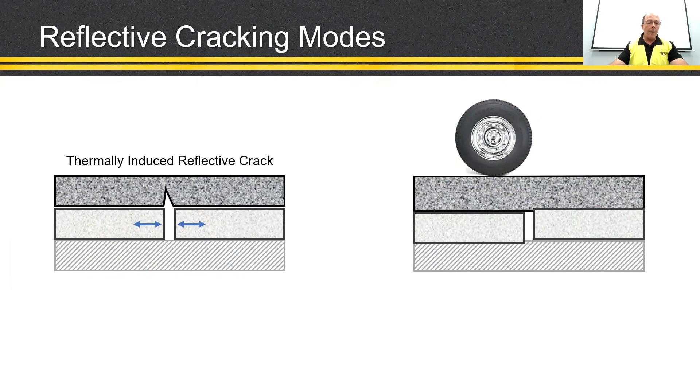So first, there's two general mechanisms for how a reflective crack can occur. One is when the underlying pavement system that has a crack, through thermal expansion, induces a reflective crack back up onto a new layer. The other is load associated, where as the load travels across, whether it's concrete pavement or a crack that goes all the way through flexible pavement, you'll have the slabs rocking up and down and create a reflective crack that way. Then there's a third, which is a hybrid of those two, where both can be happening.

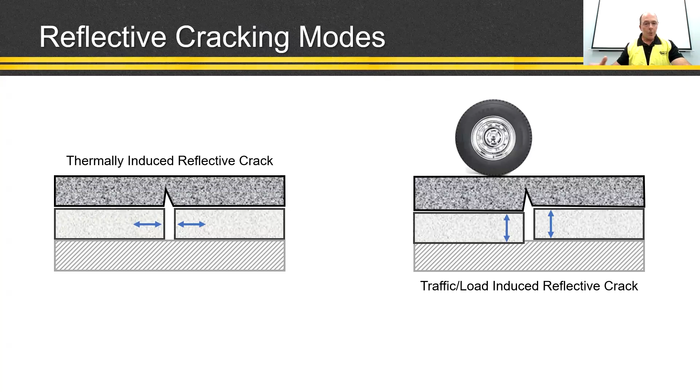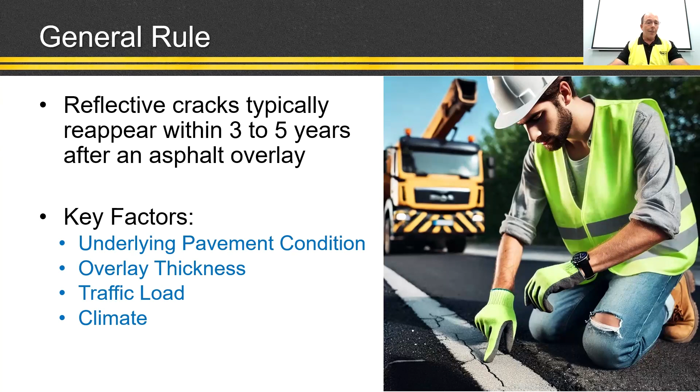Typically, if you don't use a mitigation procedure, a reflective crack will reappear in about 3 to 5 years. There's a general rule of thumb that it's anywhere between 1.5 to 2 years per inch of asphalt. So if you do a 2-inch overlay, in about 3 to 4 years, you'll actually see the reflective crack occur. But the factors that influence that are the underlying pavement condition, the overlay thickness, the loading that you have, your traffic, and the climate.

Now, both uncommon and common mitigation approaches - and I encourage you to type in the chat if you've seen these, because there's a few here I haven't seen. The first one is reinforcement. Here's one I haven't seen: using galvanized steel nesting or netting underneath it. You'll notice there's a cost associated - just to give you a relative feel for how much these different treatments cost per square yard. The pricing is based on an International Journal of Pavement Research and Technology paper from 2016, so you've got to factor in a little inflation, but this will give you a relative feel as we go between the various approaches for how much they cost.

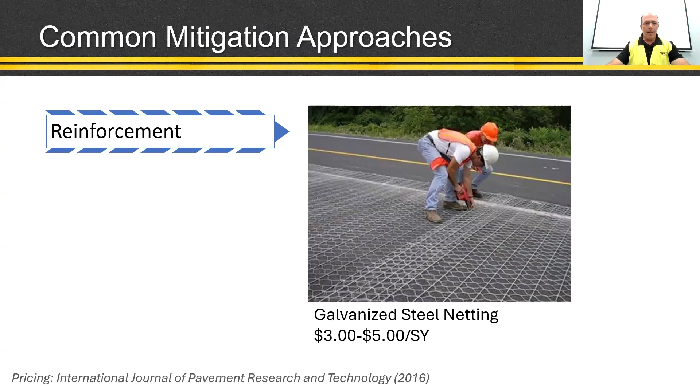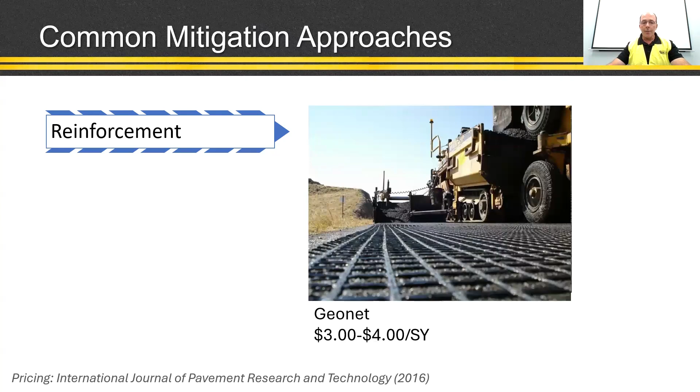So for the galvanized steel, it's $3 to $5 a square yard. Something that's a little more common that I have seen laid down is fiberglass geogrid. Another version of that is something called GeoNet. And then a glass grid, which is one of the topics I'll be discussing today that happened out at the NCAT test track.

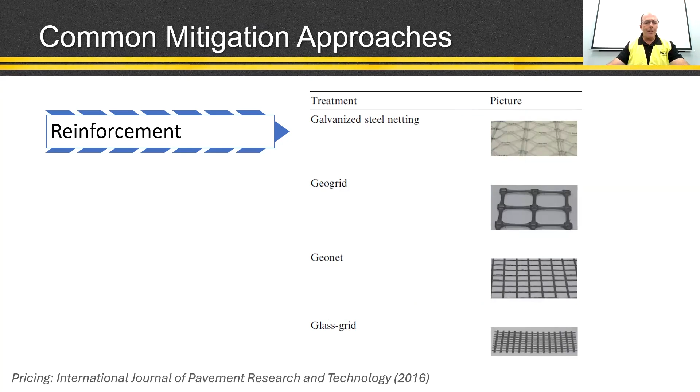So this gives you the range of reinforcement techniques that are commonly, or uncommonly in the steel case, used to try and mitigate reflective cracking. If you know of others, please type them in the chat, I'd appreciate that. In addition to reinforcement is stress relief, to make it so that as stresses build up in the underlying layer, whether through thermal or load, there's some kind of layer there.

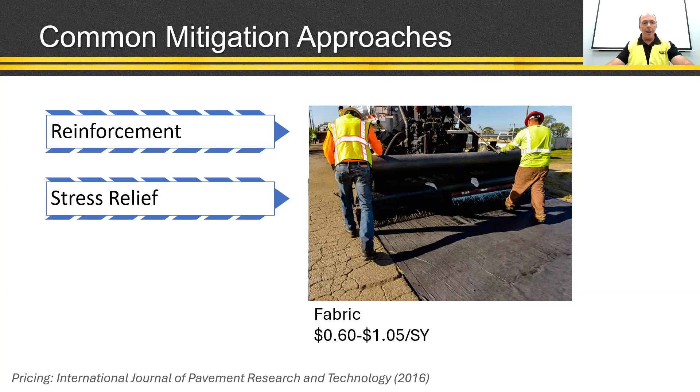The first we'll look at is fabric, and fabric was actually part of the experiment I'm going to discuss as well. You can see the pricing there as well.

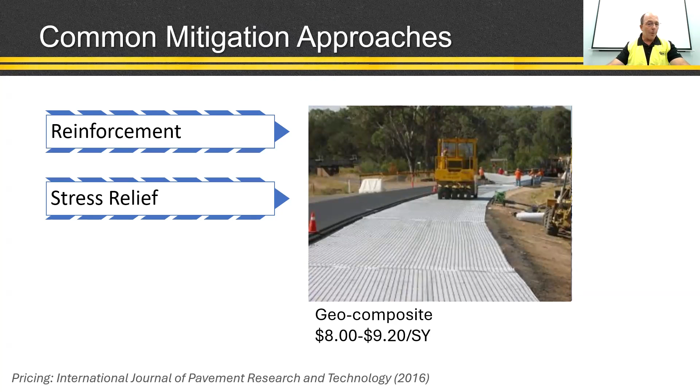And then a geocomposite. Geocomposite is best if you think about the pad underneath carpeting. The geocomposite has not only a grid in it, but also a little bit of sponginess to help relieve that stress. You'll notice the price went up on that one considerably compared to some of the other ones we've been looking at.

And then a stress-absorbing membrane interlayer, affectionately known as a SAMI. In a few moments, we'll be hearing from West Virginia and their experience with the SAMI interlayers.

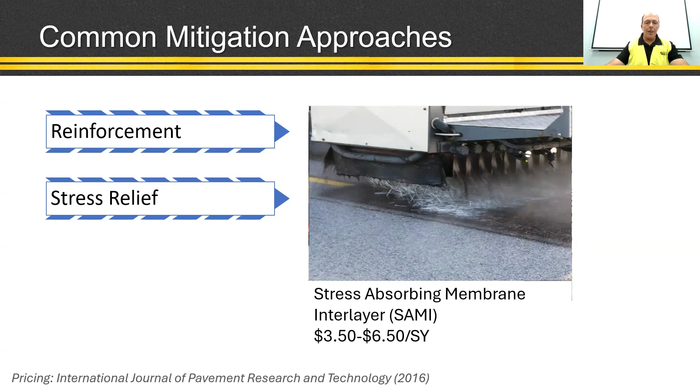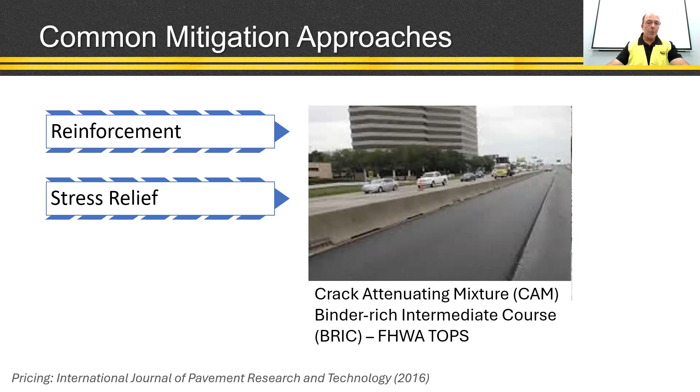If you look at FHWA under their Everyday Counts program, they also promoted TOPS, targeted overlays for pavements. There's a crack attenuating mixture, commonly referred to as a CAM, and then a binder-rich intermediate course, or BRIC. Both of those have been tried to mitigate reflective cracking.

One of the other approaches is just to control it. If you have a jointed concrete pavement and you know exactly where the cracks are and they're straight, you can mark, and after you do your asphalt overlay, saw and seal. So you basically seal the crack before it happens and create it in a uniform way, which is a little bit easier for maintenance.

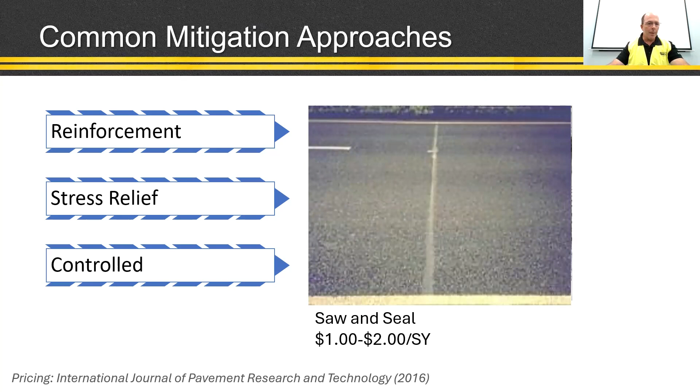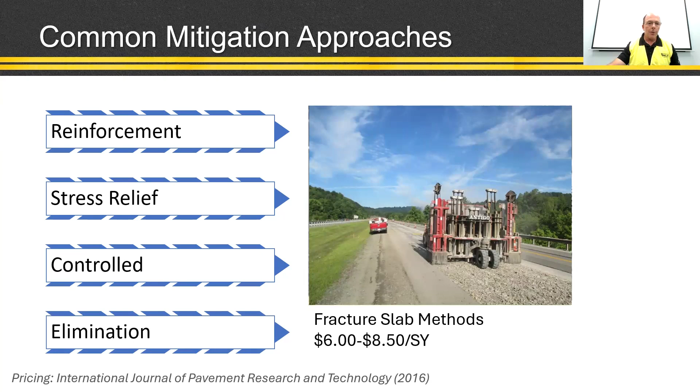And then probably the preferred method is just to get rid of those cracks altogether. If you've got a concrete pavement where the slabs are rocking, you can do a fracture slab method: either break and seat, crack and seat, or the best, which is rubblize, to eliminate the reflective crack altogether, so it's not creating that maintenance challenge with regard to your pavement.

So the NCAT test track has gone through 8 research cycles. Each research cycle, we apply over 10 million ESALs. The 1.7-mile test track is here located in Opelika, Alabama.

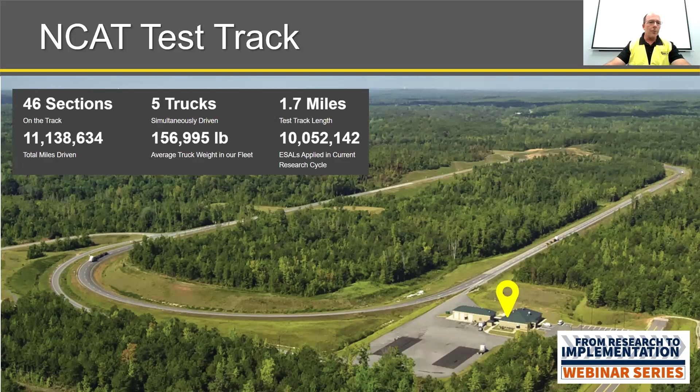11 million miles is equivalent to 23 round trips to the moon and back. And according to Nathan Moore, that's also 17 stops at Buc-ee's by the truckers.

So special thanks to Georgia DOT for sponsoring these sections. And actually, as I'm speaking today, Jacob Walker with GDOT is just a few doors down, and I believe he's in a webinar as well, something internal related.

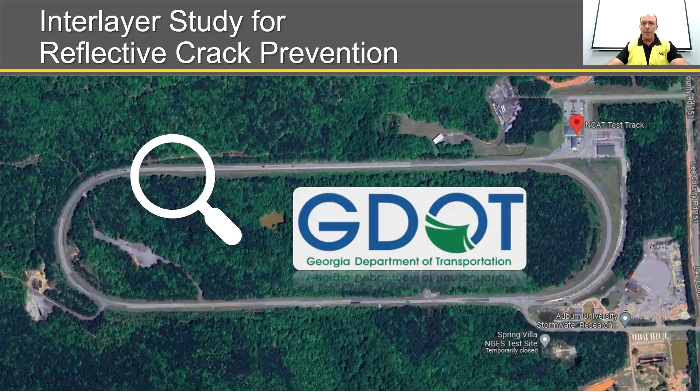So the northern section of the test track, cells N12 and N13, is what I'm going to be discussing, where we've looked on behalf of Georgia DOT at a range of crack relief approaches. In phase 5 of the test track, which occurred in 2012 through 2014, Georgia DOT wanted to look at 2 different approaches to see which one worked better to help retard cracking.

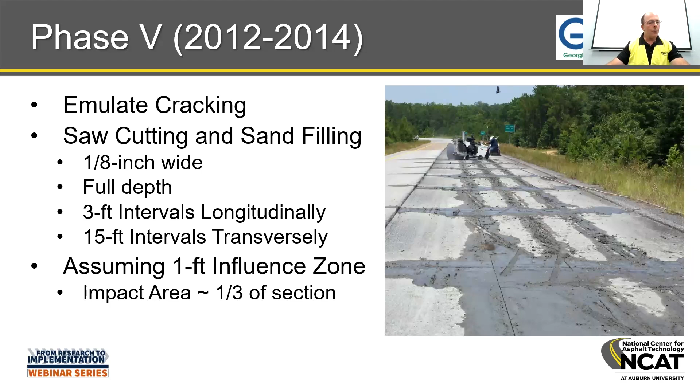And what this does, if you assume about 1 foot of influence around a working crack, is that about a third of this pavement section, the 200-foot section, is going to be impacted under load to try and transfer those reflective cracks up through the pavement structure.

So in cycle 5, carried forward into cycle 6, the two interlayers we looked at were a 0.7 inch double sand seal coat, and a 1.1 inch open graded interlayer, the OGI, which is commonly used in Georgia. Both experienced some cracking. The OGI had about half the reflective cracking come up, but the cracks were very small, low severity, under a quarter inch. Only 6% of the 0.7 double sand seal reflect cracked, but where we didn't have cracking, we had increased rutting. That's the balance we're looking at here.

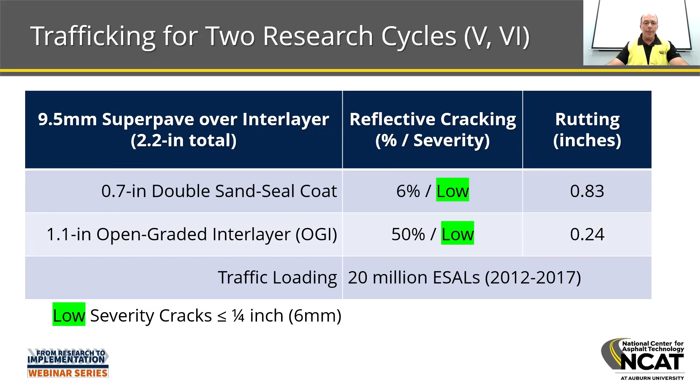So after 20 million loading, or 2 cycles, this is the data we received. At the end of that, Georgia DOT wanted to look at additional methods to mitigate or retard reflective cracking. So starting in 2018, we milled up those 2 sections, cleaned them out, resanded the joints, and applied 6 treatments.

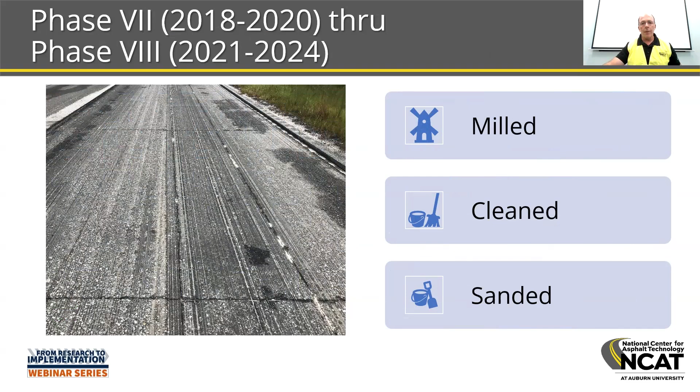Each test section was broken into 3. The first looked at interlayers, from a fabric to a glass grid, selected by the Geosynthetic Materials Association. They actually put all their members in a hat and pulled out 2 member names. GlasGrid and Petromat were selected for the first 2 parts of this. In a second, I'll show you what that looks like.

So here, starting at N12, at the top of the screen you see the Glass Grid, specifically the GlasGrid CG100. They have other products that were placed. The tack coat was a straight asphalt, a PG 64-22, applied at 0.3 gallons per square yard for the Glass Grid and 0.27 gallons per square yard for the Petromat. Of note, Petromat commonly requests a PG 70 when placing their product, but in this case it was decided to keep the tack coat the same, and as you'll see with the data, it didn't make a difference. We saw no cracking in either of these sections.

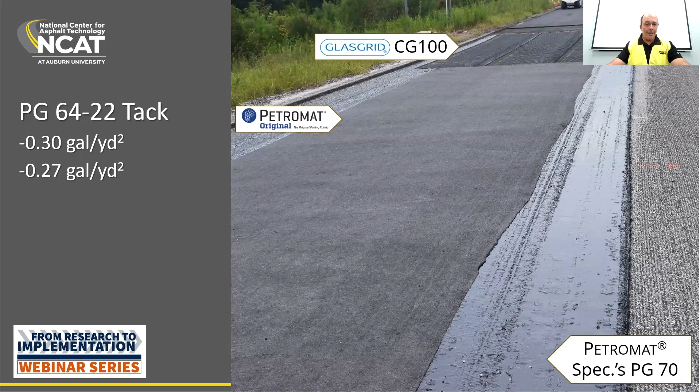Now looking down the lanes, the next section was a virgin chip seal followed by a RAP chip seal. Both had a CRS-2h tack applied at 0.23 gallons per square yard. In hindsight, keeping the tack the same for both was probably not the best course. We probably should have reduced the tack heading into the RAP chip seal, since the coated aggregate had less need for tack. You'll see here in a moment that we got a little bit higher rutting compared to these 2 sections.

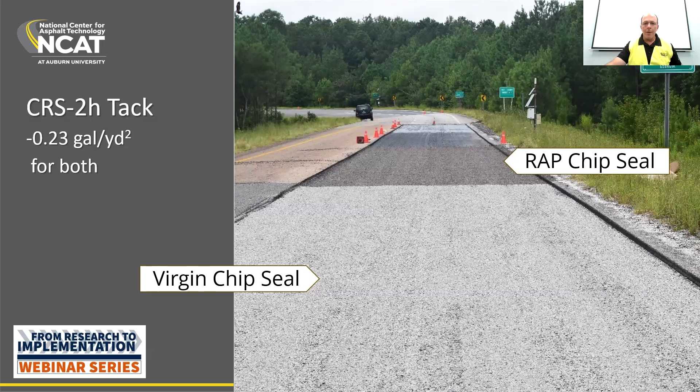Stepping down to the next 2 sections, the next one is an asphalt rubber gap graded, or ARGG, similar to an Arizona gap graded process. Under this was a trackless tack, Blackledge Ultrafuse, used at a tack rate of 0.25 gallons per square yard. Lastly was the OGI, also with the Ultrafuse trackless tack underneath it.

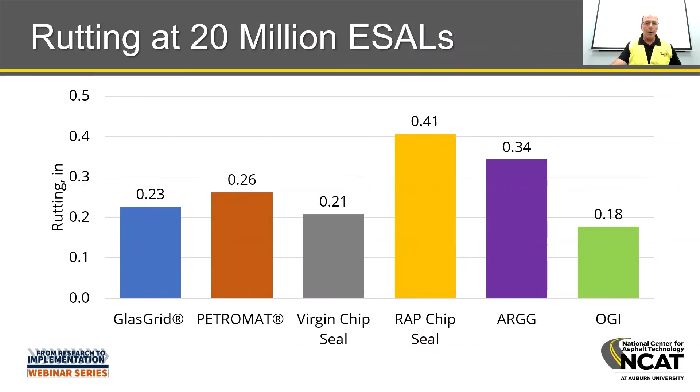Now to performance. This was done over cycles 7 and 8, so 20 million ESALs, 10 million per cycle. At the end, most sections had a quarter inch or less of rutting. The RAP chip seal had the highest, which we think might be attributed to the higher tack placed. The asphalt rubber gap graded came up next with a higher level of rutting compared to the other sections. But this is about cracking.

So where do we fall in cracking? Before looking at the plots, notice the traffic loading doesn't start at 0, it starts 1.5 cycles into the experiment. So at 15 million ESALs is when we saw our first crack, which then propagated out to around 3.1%, for the asphalt rubber gap graded section. In a moment, I'm going to compare the original experiment to this one.

Between the original, under cycle 5, and this one, starting under cycle 7, we changed how we were measuring cracks. In the original experiment we used the Buzz-O-Matic 2000 - that's a joke - where a technician would get down and look very closely, and as soon as we could see a crack, it was cracked. These newer cracks are what we could measure with instrumentation, more in line with what a DOT would use to determine crack initiation.

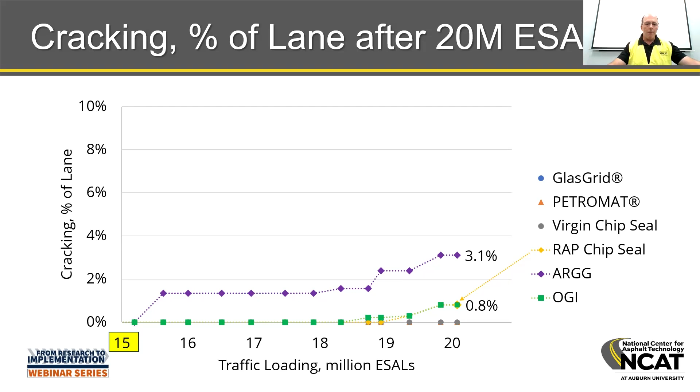Later, almost towards the end of the experiment, 2 other sections, the RAP and the OGI, also experienced very light cracking, less than 1%. Showing that graphically: the glass grid, the Petromat, and the virgin chip seal had no cracking after 20 million ESALs. The RAP and the OGI came in at 0.8%, and the asphalt rubber gap graded a little over 3%.

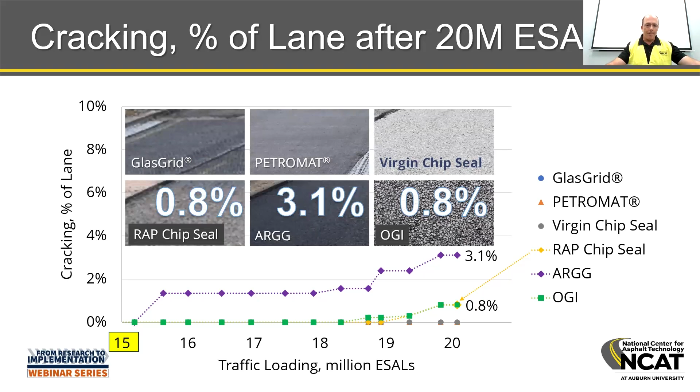During the test track conference, and I encourage you, if you ever get a chance to come to the test track conference, that's where you get to see this. We get to play Dr. Ben Bowers' favorite game, which is Find That Crack.

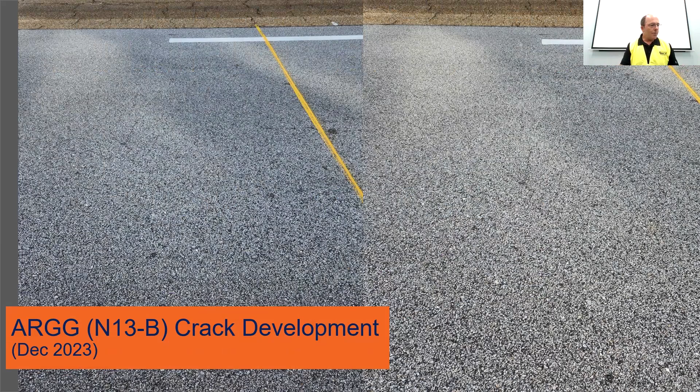As you look at these two sections, this is both the asphalt rubber gap graded on the right and the left, just prior to the end of the cycle, so around 18 million ESALs. You can look and look and you'll see, oh, there is a crack right there. That's where we're starting to get that cracking. Even that is relatively low in thickness, and it's relatively moderate.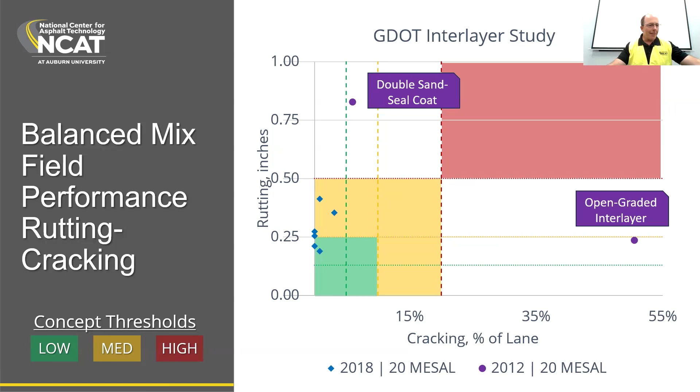And then if I zoom into this round of experiments, the later round, you'll see that all of the sections performed extremely well in mitigating the cracking. All the cracking was low in severity for the three sections that did crack. And we did get a little bit higher rutting in two of the sections.

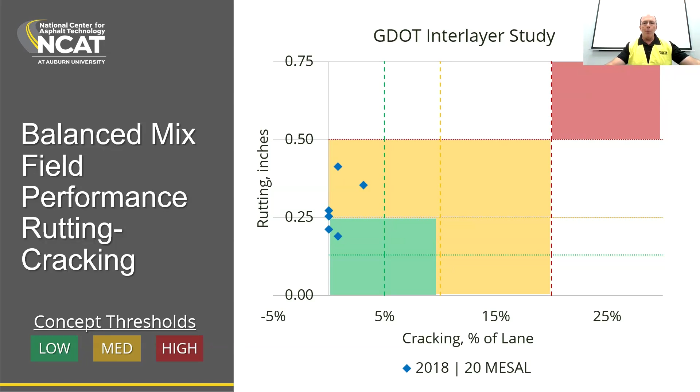To look at this more from a rating system, you might say I came up with my own version of Yelp. This is the Tom Harman version of Yelp, where the red stars are for rutting and the blue stars are for cracking. If you have five stars, you're doing fantastic.

So the top three, the GlasGrid, the Petromat, and the virgin chip, no cracking at all. They all had just a little bit of rutting, so I'm only giving four out of five stars for that. As we step down to the RAP and the OGI, a little bit of cracking, a little bit of rutting, a little bit more rutting in the RAP, and the asphalt rubber gap graded is getting four stars for both.

For the dollar signs that you would typically see in this type of rating system, this is normalized based on no interlayer, just a full depth cost analysis. Georgia DOT was nice enough to give me some of their 2024 cost data, and then I filled in the blank with publicly facing data on the internet, just to give you a relative feel for which ones are more or less cost effective.

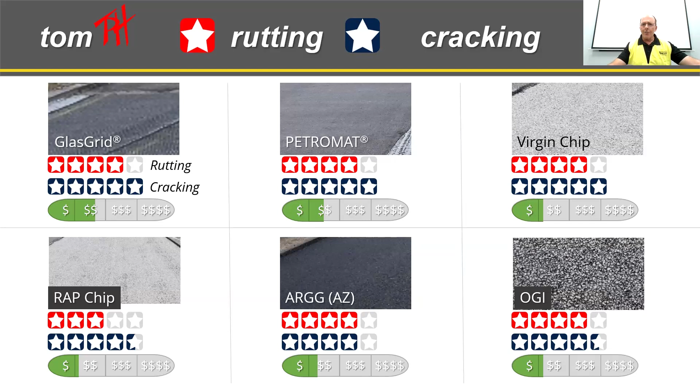So let's take a walk down the track and see what these sections look like towards the end of their loading. This is the GlasGrid, and we're looking down over all the sections. Very light rutting, no cracking at all.

If you were to go out there today, these sections have been milled. A HIMA binder has been used to place an intermediate course, and Georgia has a new section going down looking at things that could be cost competitive with an SMA. They're looking at HIMA binder and modified binders in a balanced mix design.

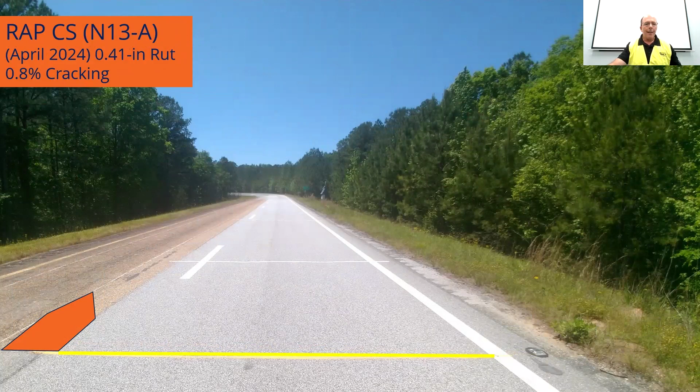So again, here's the GlasGrid, little bit of rutting, no cracking. Very, very similar. Here's the Petromat, a little bit of rutting, no cracking. Stepping down, here's the virgin chip seal, a little bit of rutting, no cracking. Now we get just a touch of cracking, 0.8%, and the RAP, 0.4 inches of rutting.

Going down a little farther, here we have the highest amount of cracking, but only 3%, and a little bit of rutting in the asphalt rubber, and the OGI rounds it off with 0.8% cracking and a little bit of rutting. So here's what we can say about the interlayer research after 20 million ESALs: there is a wide range of interlayer approaches that can be used and have been shown to mitigate reflective cracking or lessen it.

We got slightly higher rutting in the RAP chip seal. This is section N13A, most likely due to the impact of the higher tack coat application. We should have backed that off slightly. And then for the asphalt rubber gap graded, we believe the material we placed was a little too flexible, and that's the reason why that one demonstrated the higher cracking.

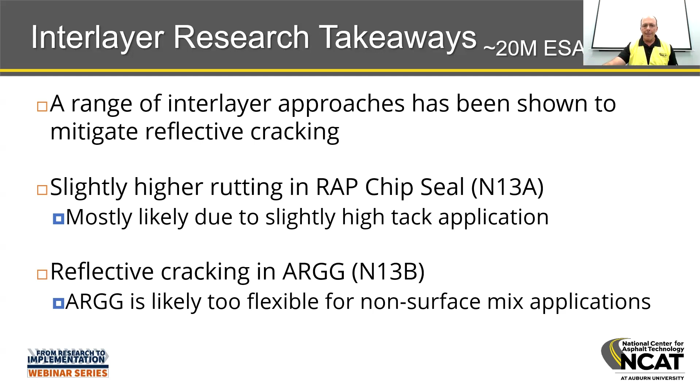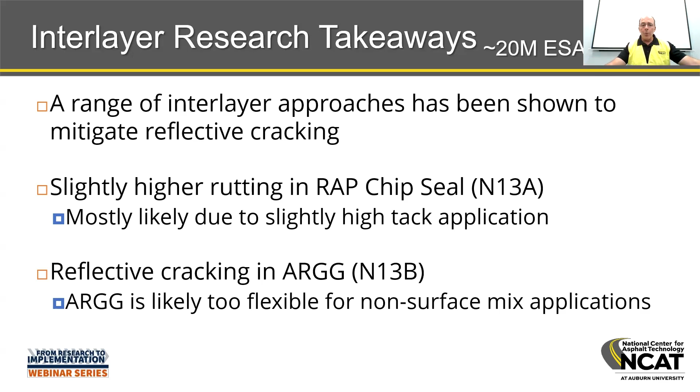Again, my name is Vincent Allison. I'm with the West Virginia DOT, and I want to talk about our relatively brief experience with SAMI, the stress-absorbing membrane interlayer.

So for those that don't know, SAMI, as Tom had mentioned, is essentially a chip seal with fibers, and it's meant to help with reflective cracking. Some agencies will put one of these just right on the surface and leave it there. I think Strausser calls theirs a fiber mat.

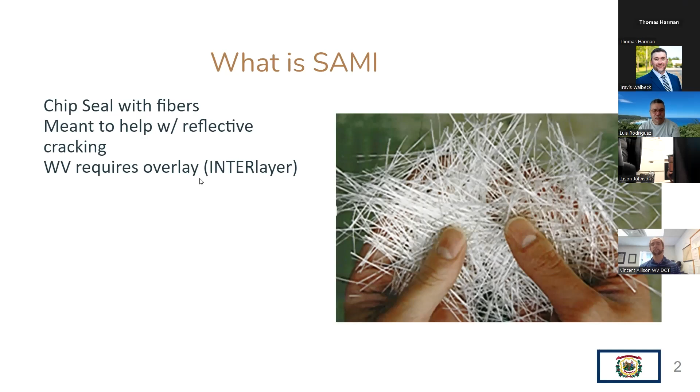But in West Virginia, our specification treats it as an interlayer, so therefore we require an overlay. And I'm using the same picture as Tom here. I can't quite recall where that picture came from originally, but it's a great photo that really shows what's going on there under the hood.

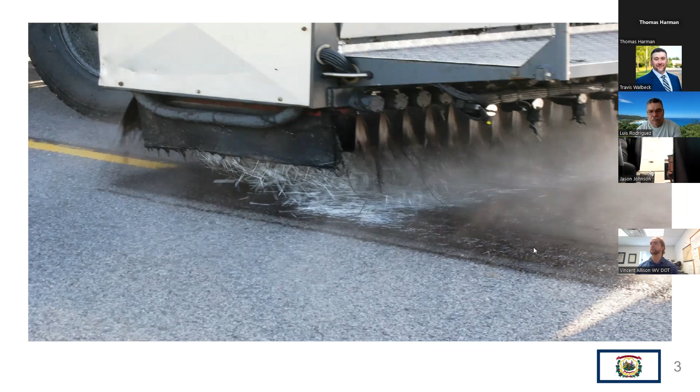So we've got your emulsion spraying down first. That's your first half, and there's your fibers going down, and then the last half of your emulsion covering them up, so that unless you're actually looking for the fibers, those little lines in the emulsion, you can't really see them. So aside from that application, it just looks like a chip seal afterwards.

So you place your chips, your aggregates with a regular old chip spreader, and then hit it with your rubber tire rollers, or I guess if you're Kentucky, your steel wheel rollers as well. Ideally without any streaks in it like this. But yeah, a lot of your chip seal best practices are going to apply to your SAMI seal as well.

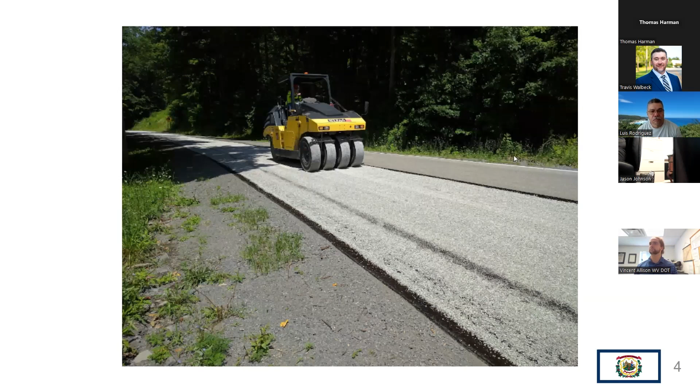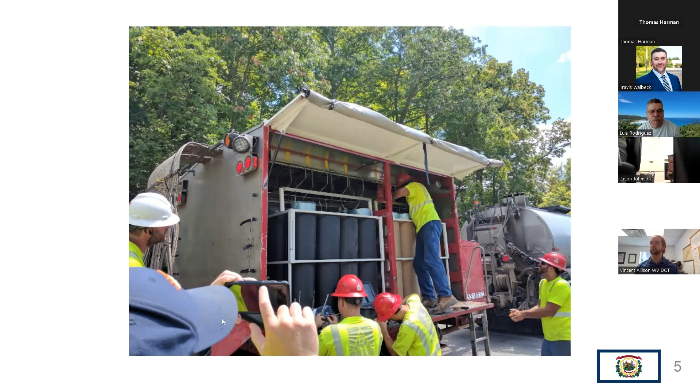And of course, with any specialized equipment, it's got its own challenges. So here you can see the inside of the machine. I guess we were kind of fortunate on that day to see it break down, but the spools of fiberglass feeding the machine got kind of clogged up. So they were able to open that up, and there's Travis actually. I was doing my pictures of people taking pictures. So we both got that photo there.

So in our state specifically, we've done a little over 20 projects, and we've hit ADTs between 300 and 25,000. Our spec generally uses AASHTO number 8s, and we use a polymer modified emulsion, typically a CRS2P at roughly 0.35 to 0.45 gallons per square yard.

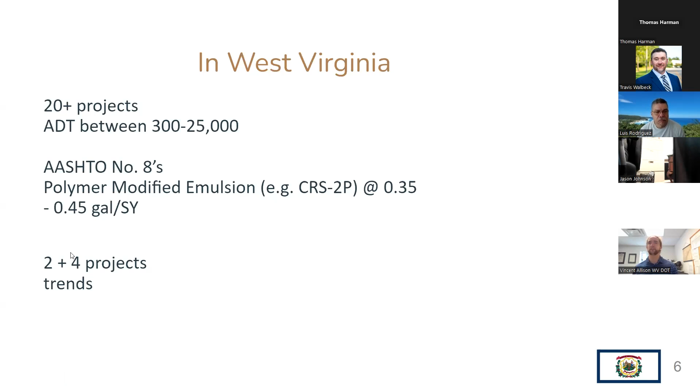Today, I'm going to look at 2 plus 4 projects. So 2 projects that are a little older, we'll look at how those are performing, and then 4 projects that are a little newer, and some lessons learned from those, and see if we can pick out any trends in there.

So here's a project from 2016. It was a rural route, and it had an ADT of about 800. On top of it, we put down 1.25 inches of what we call wearing one, a Marshall mix. The emulsion was a CRS2P at 0.37 gallons per square yard, and this job did not have any milling. According to our records, tack coat was not used.

So here's the road before. Hopefully you can see that there's some cracking and some loss of material even here in the center, with some patching up here, at the top part of the picture. Drainage is not great, but we're working on that all over the state.

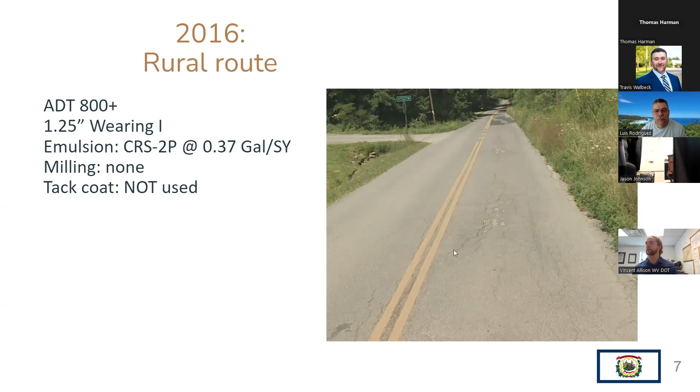And in our next picture, we've got a photo from 2019 from our data collection for our pavement management system. And according to that data, the rutting is in the good category, according to Federal Highways condition thresholds. Cracking is good, and the IRI is fair as of 2019, so 3 years later.

Can't expect IRI to get that much better, especially if you're not milling. But you can see, aside from this edge cracking here, we're looking pretty good. So what's the rule of thumb? We've got 1 inch of cracking per year through 1 inch of asphalt. So after 3 years, you would probably expect to see some cracking, but at least from this photo, we're not seeing much of that.

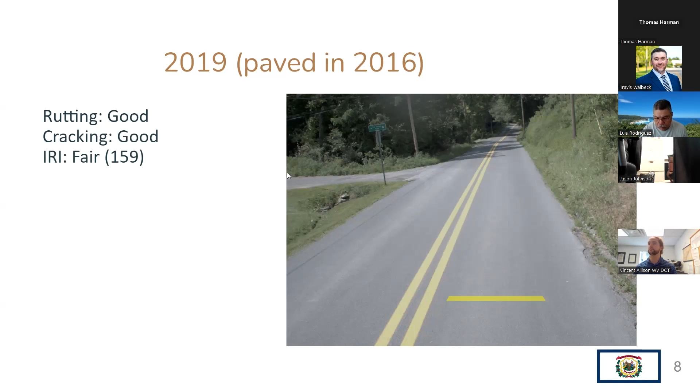Okay, here's one of my favorite ones. This one was in 2018, and this was on a multi-lane job. This is actually an exit off of the interstate. So these turns here go off to Interstate 64, so a lot of traffic coming in and out, especially truck traffic. Our ADT was 10,000, and on this job, we put 1.5 inches of 12.5 Superpave. Again, our emulsion was a CRS2P at 0.37 gallons per square yard.

Here's a photo from 2022. Again, our rutting is in the good category, cracking is in the good category, and our IRI is fair at 127. So there's 4 years of traffic, and you can see those cracks coming back over where those patches were.

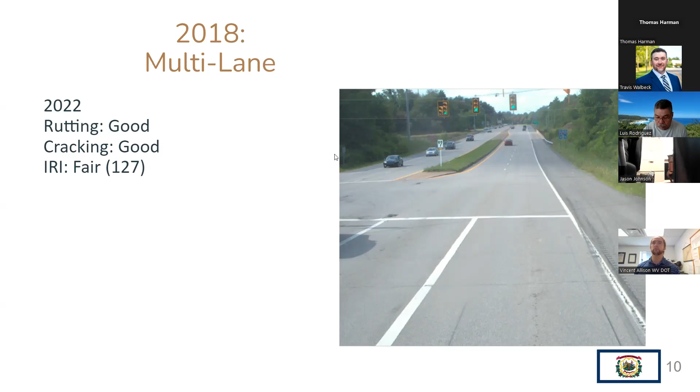So this brings up the question: we put 1.5 inches, and after 2 years we're starting to see cracking again. So the question is, is that SAMI seal helping with the reflective cracking or not? Would we have had similar results if we just put 1.5 inches without that SAMI seal?

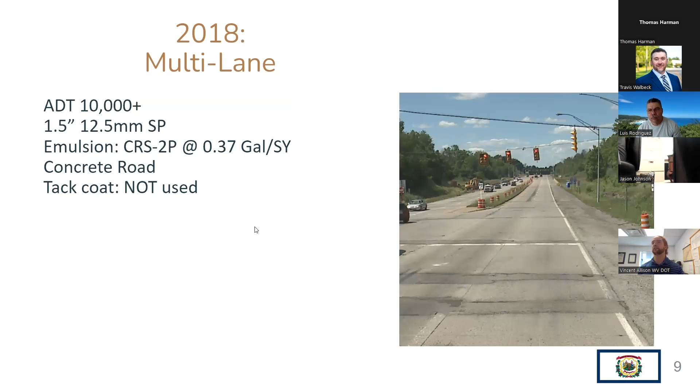Think about it for a second. If you're an agency, are you happy with these results? To me, given the condition of these cracks as they are now, if the road originally looked like that, then no, I wouldn't be happy. But keep in mind the original condition of this road. It was obviously in very rough shape to have these massive patches. Plenty of traffic, plenty of truck traffic. I think we're doing pretty all right here.

So I guess this is as good a point as any to remind everyone that you're never really going to completely get rid of reflective cracking unless, like Tom said, you really deal with the base with rubberization or removal and replacement. I was told a long time ago, if anybody claims they can eliminate reflective cracking, they're probably lying. So yeah, we've slowed it down here, I think.

So we'll look at some newer SAMI jobs and some of the things that we've learned from those. Here's a project in 2021. This was going through town, ADT of about 2,900, and the overlay on top of this was 2 inches of 12.5 Super Pave. Again, there's our CRS2P emulsion at 0.39, and we did do fine milling on this stretch of road as well. I think the primary purpose of that really was to maintain grade with the curb and gutter there.

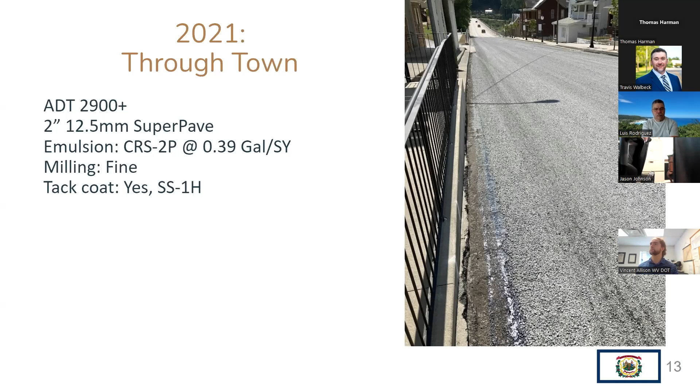And this project did use a tack coat, an SS1H. So here's a picture of the SAMI, pretty decent application, fairly uniform. And here's a picture after. So we got good density results, 92.7 to 94 on the paving mat. The IRI after completion was 164, down from 294.

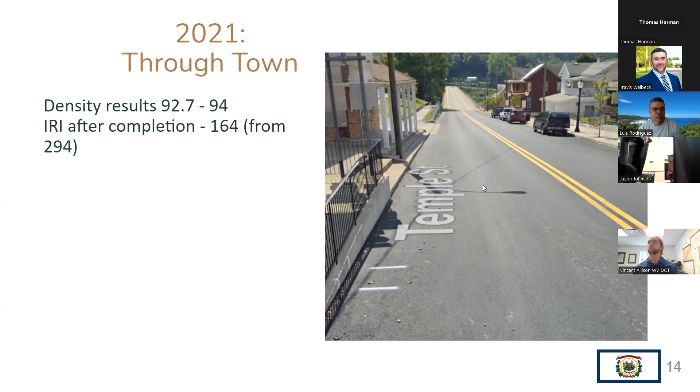So pretty good improvement there. Of course, you can't expect the smoothest thing going through town over all kinds of utilities and things like that. But yeah, we were happy with this project. To my knowledge, we didn't hear any bad news, and as we say in the central office here in West Virginia, no news is good news. So this one seemed to have gone off without a hitch. The district liked it, the district was happy with the results. Unfortunately, I've not done any follow-up since 2021.

Okay, this is where things start to get interesting. This project was a multi-lane job on what we call Corridor G, US 119. This was in 2020. It's a multi-lane job, 19,000 ADT, so we're really getting up there now. We put 2 inches of 12.5 Super Pave on top of the SAMI, and the emulsion again was a CRS2P. This job also included milling prior to the SAMI, and there was a tack coat that was used.

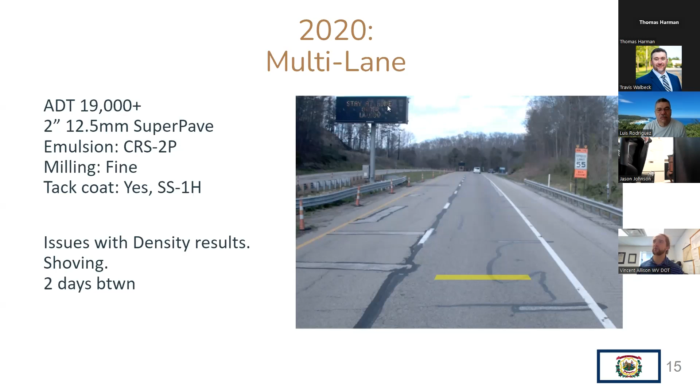And we heard relatively early on that the district was having issues getting density results. There was shoving of the asphalt on top of that SAMI layer. And of course, one of the first questions you ask is, did the SAMI have time to cure out? So we were told that there was 2 days between placement of the SAMI and the overlay. By the way, you can see, of course, 2020, the sign there, 'stay at home order, westvirginia.gov.' So this was COVID for sure, COVID times.

So here were the pictures that the district had sent us. You can see our SAMI layer here is definitely shoving from whatever, I assume, from the rollers, from trying to get density. And you can see that the material that they were able to pick up from that was not very stable. You can see the fibers keeping things together.

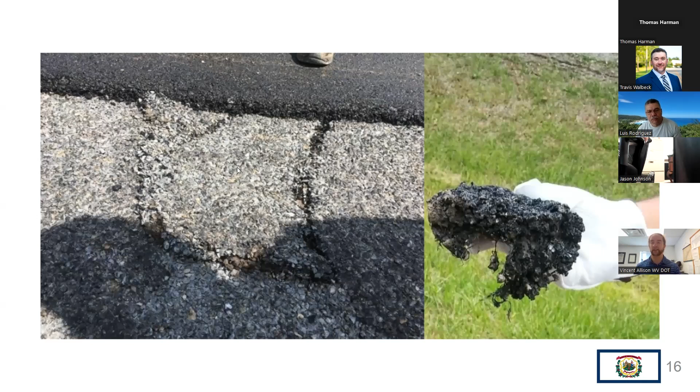Yeah, so that is not what you want to see when you're trying to compact asphalt. You don't want the ground moving underneath you.

So here's that same job in 2022, picture from our pavement data collection. What they ended up doing was they pulled that SAMI seal on some parts of the project as they were paving.

However, we did pay bonuses for smoothness, so it had good results there, and density results were between 89 and 96, and I'm talking about on the main line there, not the shoulder.

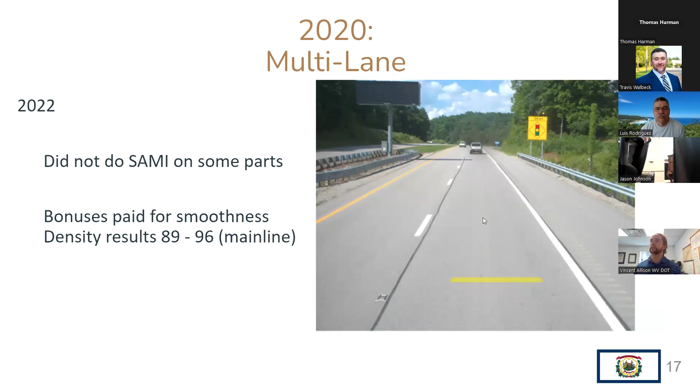So how much did the shoving from the SAMI really affect the density of the overlay? I pulled up all the data from the density results of each individual lot, and again, this is all from the main line.

These blue data points are our average densities per lot with the SAMI seal. And then the red dots, the two red dots here, are without the SAMI seal.

So just looking at the numbers here, you could say the average density increased by a whole percentage point. You could argue that that's pretty significant. But if you look at the actual data points, this first red dot is right in line with all of the other data points with the SAMI, and this one without the SAMI is way above.

So again, it's only 2 lots, and I'd say that was a little inconclusive. Perhaps it helped to forego the SAMI on a couple of those sections.

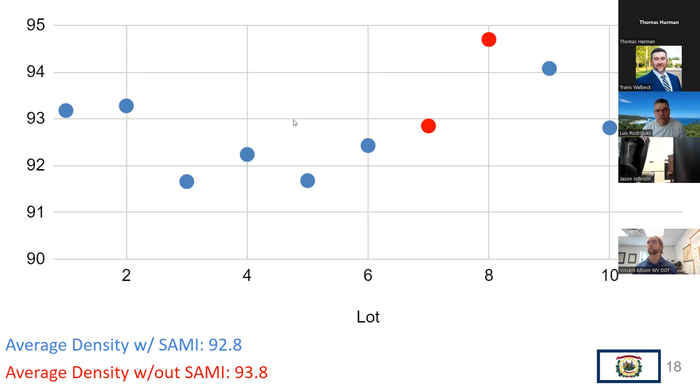Okay, so fast forward to 2021, another multi-lane project, 9,000 plus ADT. And this one, the district really wanted to delay their reflective cracking. So they put a total of 4 inches on top of the SAMI, on top of this concrete road here.

And in addition to that, this project included a joint membrane material. You can see these at pretty much every joint here, these little humps. I think the district was going for kind of like a belt and suspenders kind of thing, right?

So they put this asphalt membrane over the joints, which we won't talk about that too much today, and on top of that, they did our SAMI seal. Unfortunately, that kind of came back to bite them, because the asphalt was shoving and humping up and stopping at those membranes on the joints, obviously causing some issues with density.

So we had some folks go out to the job site, talk to the contractors, and talk to the SAMI salesman. The idea at the time was that things were too hot, right? It was a hot summer day.

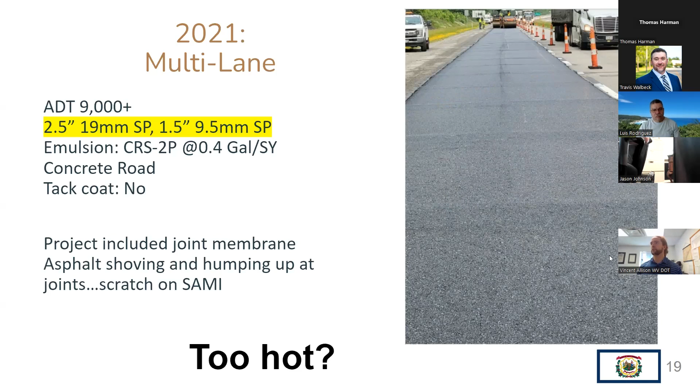So that ended up working, actually, and it solved the problem at a cost, of course, but things turned out well. We had an average IRI of 48, of course, with 4 inches of asphalt. We're able to get some lower numbers there.

Average densities on that 19 millimeter prior to applying the scratch were 91.8, and after the scratch was 93.3 to 96. So obviously that layer of scratch helped.

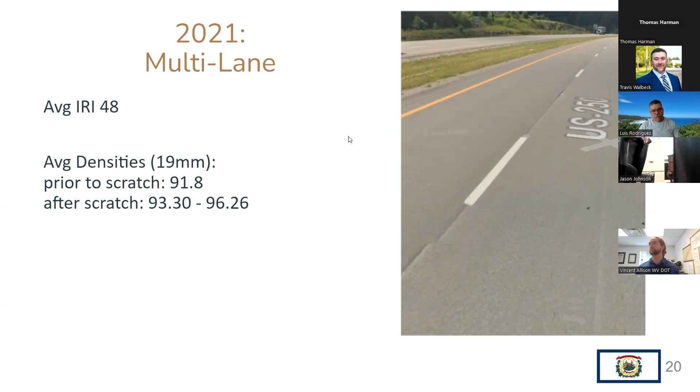So that brings us to 2022. We're doing SAMI seal on the interstate now, where our ADT is over 24,000. This is near Beckley on Interstate 64.

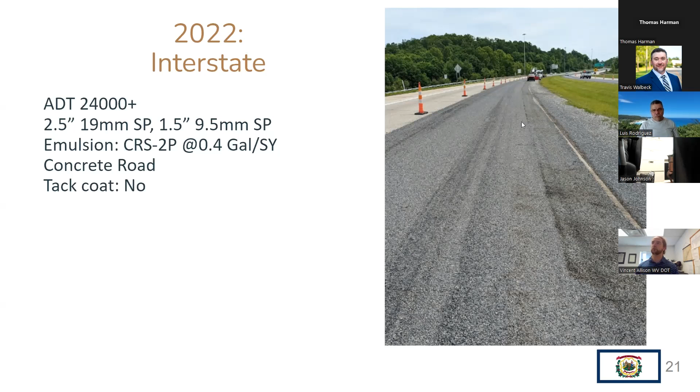Again, we're going for a 4-inch total, right? 2.5 of 19 millimeter, 1.5 of 9.5. And again, because of that project in 2020 where there was a lot of movement, they decided to forego the tack coat again. And this time they gave it, I think they said, a whole week after placement of the SAMI layer before trying to put the overlay.

They were still having issues with compaction due to the asphalt shoving. After the problems from the two years prior, we were out there on day one trying to make sure we could get ahead of things as much as we could.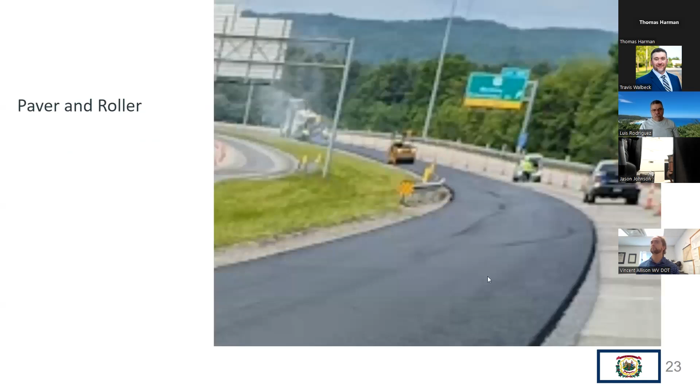This is one pass after the second roller. So just one pass, we moved one to two inches here. Obviously not what you want to see if you're trying to compact your asphalt. If it's moving around, you can't get that dense.

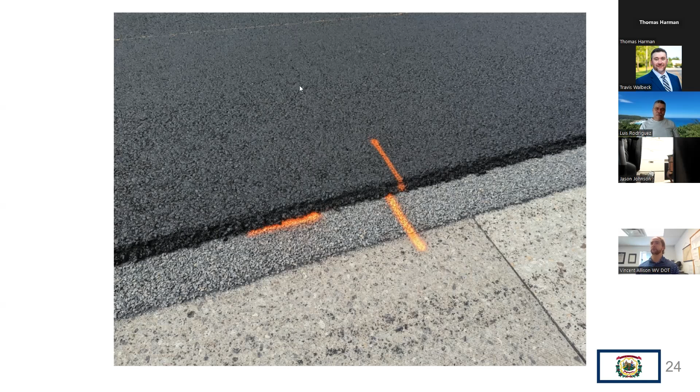Ultimately what they decided to do was to stop paving and include that half inch of scratch again. A big change order went through, $772,000 to put that half inch of scratch at $124 a ton.

After that, densities were between 92 and 94. As you can see in this picture, things end up turning out okay. We had four lanes at least in this section where we've got an on-ramp, and three lanes was the majority of the main line.

So that brings us to our summary. We've had multiple contractors and kind of mixed results, right? We've had slipping or shoving on both milled asphalt and concrete.

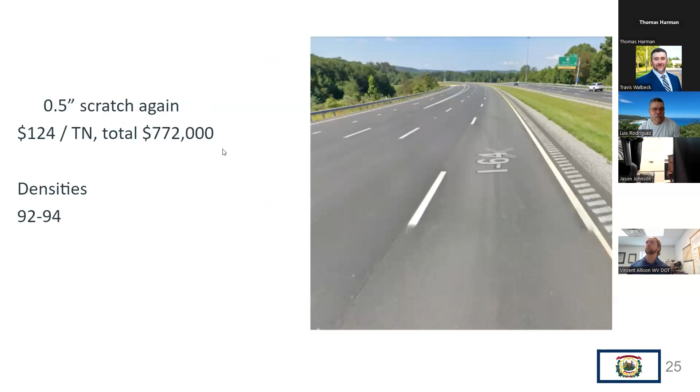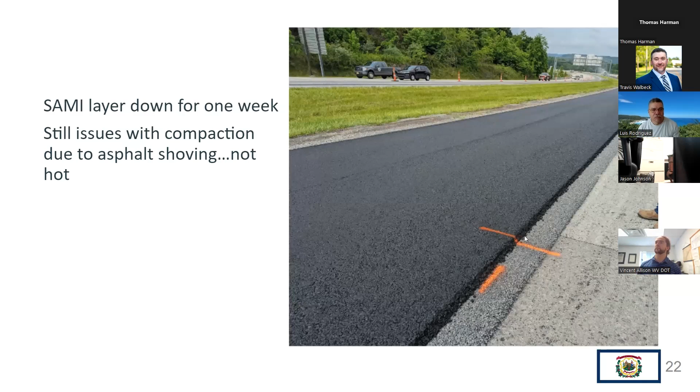Cooling did not seem to help, letting the asphalt sit for a minute, and that was back on this project. As you can see, they're way down there, and the idea was to wait a little bit to make sure the asphalt wasn't too hot. Maybe one theory was that it was too hot, and that's why it was moving so much.

However, it does seem that in all cases, that half inch layer of scratch seems to help. So at this point, we've told our designers to include that half inch layer of scratch from the start on future jobs.

But at that point, it brings up the question of what's the cost of that. You're doing multiple passes already for the SAMI, you're adding a half inch of scratch, and at what point would it be better to just pave thicker? Because that's also a method of delaying that cracking from showing up at the top.

It is my opinion that we've let the pendulum swing too far from one side to the other. So sure, on those early jobs, we had some shoving with a lot of emulsion. But it's my opinion that on that later job, the 2022 project, since we had a whole week for that emulsion to set up and be exposed to some traffic...

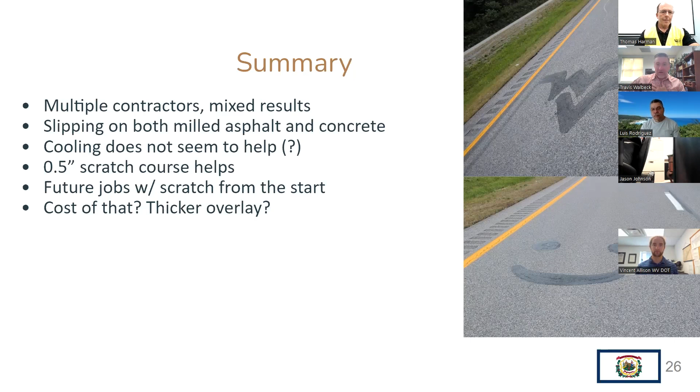Some of the real takeaways from what we've talked about today: I think we heard from both Tom and Vince that we're not going to stop the reflective cracking all the way. We're not going to eliminate it from happening. But what we can do is slow it down, and that really is the goal. What methods do we have? What things can we use that are going to slow that cracking down?

And there are many options to choose from. Tom went through a whole list of different options that we've tried on the test track, and some that we've not even tried on the test track. And then Vince also showed where they had done a belt and suspenders approach, using a couple of methods together.

One of the things to consider when using those different options is what happens during the next cycle of reconstruction. There was some discussion about the galvanized grid - how does that come up? How does that mill?

I know I've seen several projects where there was a geosynthetic fabric in the pavement that the designers didn't necessarily know about, and as the construction process got into that geosynthetic, they had some issues. Vince and I saw one in West Virginia together, and I've seen one on a runway that really turned into a mess because we need to think and be cognizant about what happens next with this.

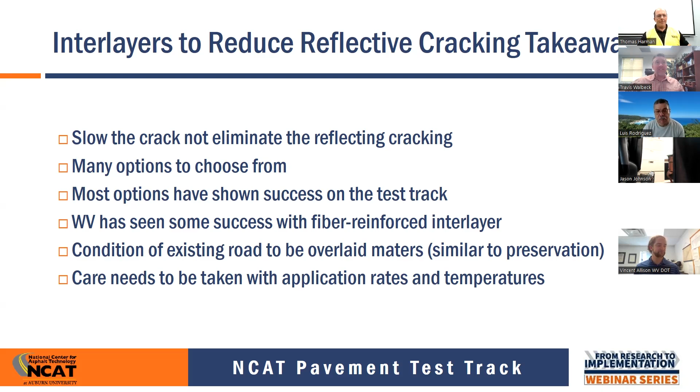So I'm seeing that's kind of the end of the questions that have been in here, which I think is great. A couple things that I always want to make sure and cover. Tom did talk about this here a few minutes ago, that if you visit our website at ncat.us, you can get in there and find the research, and you can find these test track findings documents.

You can find the test track full reports and additional information on what we've done on the track when it comes to these. It's got a pretty good search function on our research website, where you can search specific topics and find what you need.

I also want to plug another place to find specific information, including the NCAT research. Did they rename it, Tom? I think they renamed it Mac... Ruber? No, what did they rename it? They named it MacAdam, right? That HeyNapa site has been renamed.

You're muted. You're still muted. You're making me laugh. Did they really do that?

I think they did. The HeyNapa website is a fantastic place to find these kinds of resources, and it only draws from NCAT research, FHWA published documents, and NAPA published documents. So it's vetted information, not pulled from the whole internet. It's built on ChatGPT software, so it's a fantastic resource. It also gives you all the references to anything you looked at. You can look at the PDFs, the full document, or just the page it came from. Great resource, in my opinion.